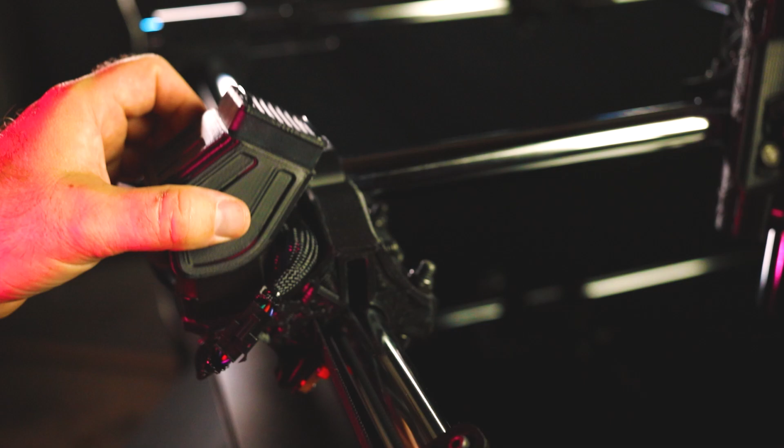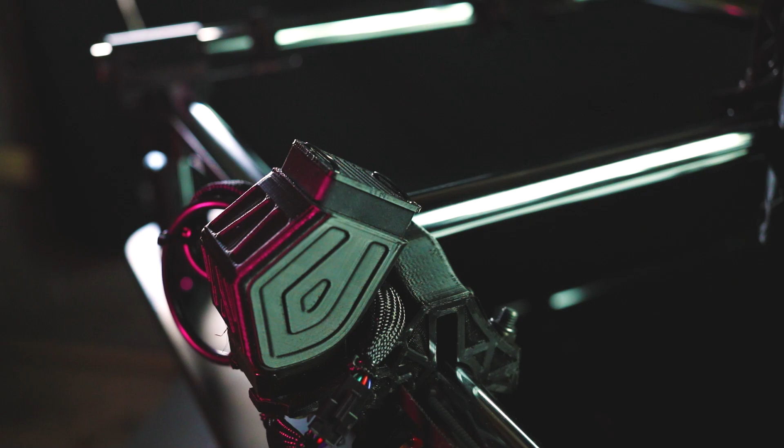since I've been using those fans. So I'd really suggest, if you're like me and want to push the machine to its absolute maximum, having some fan motors on your machine is going to be really helpful for the long term of the health of the machine.

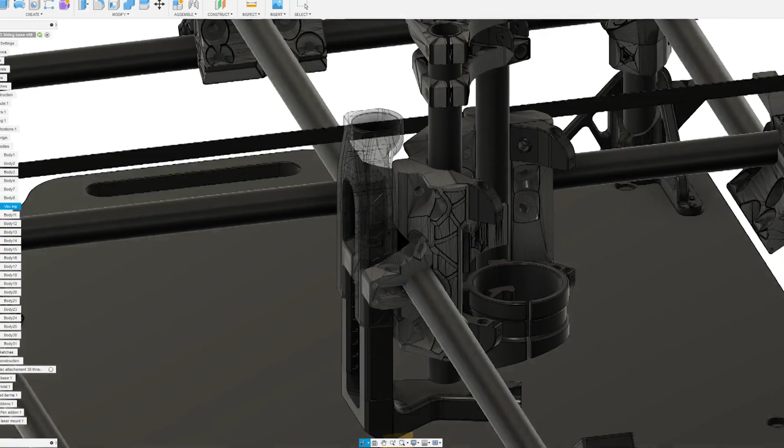Now, I've also upgraded the vacuum system for this machine as well. So if you've watched my previous video, I created what I call a Koala Vac. The idea is this vacuum housing just kind of grabs hold of the back there and is hidden. And that stops it from creating too much bulk out the front, because as we all know, once you start to add the vacuum system in front of your spindle, you start to lose a lot of your machine space.

So having it at the back here hides it really well, and also reduces the amount of space that it's used. So I haven't had a good chance to run that yet, but I've put the files out there for you if you want to have a look at it and give it a go for yourself. They're certainly there and available for you to download.

So it does give you a bit of a hint what I have and haven't been doing with this machine so far. So I haven't been creating any dust with the machine. I haven't put a spindle on there yet. Now, I don't really have a use for that because I have my Workbee CNC to run all my timber stuff on. So this machine for me was really about creating a machine for creativity. So things that are everything but cutting timber, such as using your pen or painting or even laser engraving and things like that. But I'm going to jump into that stuff later on in the video.

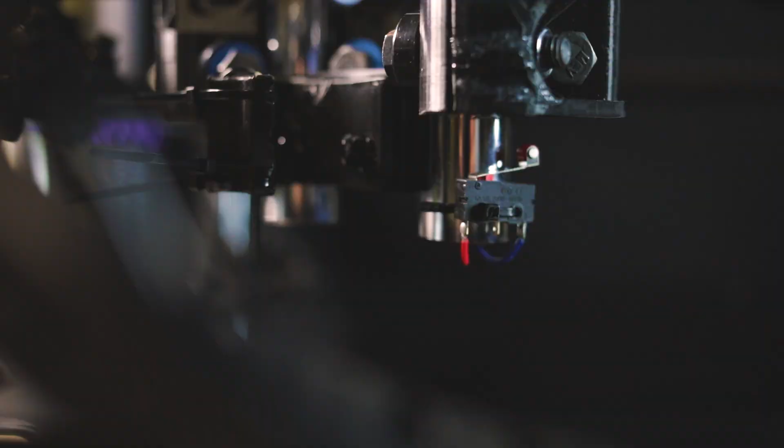So one other thing to take note of here with the electronics is that I've added my end stop to the base of my Z-axis. So I've just put a wire down the center there and popped it out the bottom and just used a zip tie to hold on that limit switch at the bottom. And that works out really well, and means when I home my machine at the very beginning, it goes to its maximum height. And then you can bring it down and set your Z height as needed. So that's a really nice addition to have.

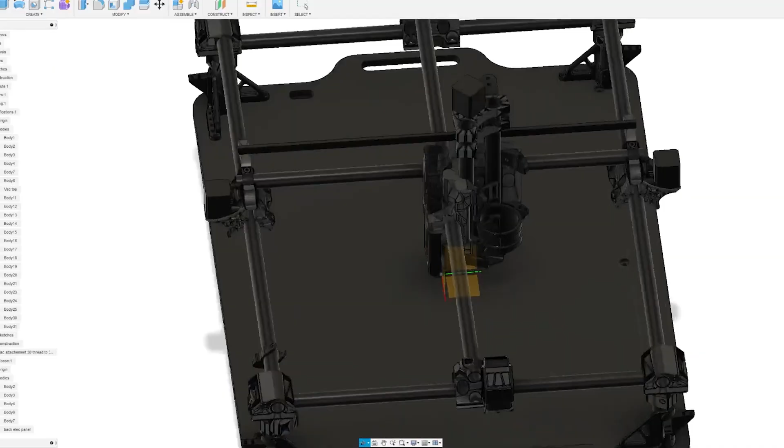Now, I'm going to talk a little bit about the electronics and what's underneath this build. So as you can see, I've created this custom table, and that uses a 30 degree chamfer around the side there, and the idea is to hide it a bit so it's kind of floating on top. But the other idea is that I wanted to put a drawer underneath so it's easily accessible to put items into, and my electronics on the other side.

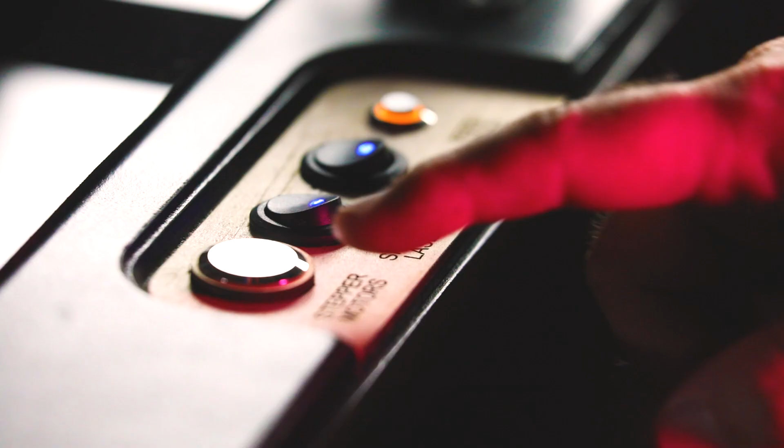So as you can see on the very front of my machine, I have 4 switches. The very first switch is to disable my motors. Now, sometimes when you're moving your machine around, you just want to make a slightly different adjustment, or you might be halfway through a job and you've paused it and you can't move the machine. So to be able to disable the motors and move the axis physically can be quite helpful.

The next 2 buttons, I've got a little rocker switch there. Those control the power outlets at the back of the machine. It's really nice to have access from both directions. I can turn those power switches on and off at the back and at the front. Now I've added them so I can put in extra things like lasers or vacuum cleaners or even a spindle, and I can just attach it straight to the back there and just turn it on and off from the very front of the machine. So it's really helpful to have that access in the little control panel.

The very last switch I absolutely love. This is a feed hold button, and that essentially just interrupts any machining that you're doing at that time. So if you're running something and you need to quickly change something but you don't want to stop the machining, it's really nice to have a little button there. I can just quickly press it and it pauses the machine program. I can quickly fix what I need to and then press play back on the computer, and then it continues as normal. So if you do have the ability to put an interrupt into your system, it's something that I would certainly suggest doing.

Now on the front of the machine, you can see that I've got a USB input. I use Universal G-code Sender for a lot of my computer-based CNC control work. I have an SD card there. Now, I'm going to talk about the SD card because that's really important as part of the offline mode of this machine. And I've got an e-stop too. So the e-stop is, I just click it once, it shuts off the machine completely. And I just use that as an on and off button mainly for my machine at all times.

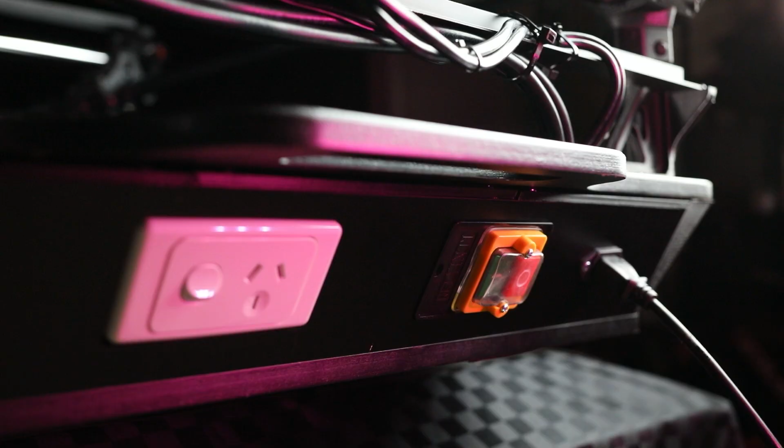Now at the back you saw that I have the 2 outlets for the electricity. And I also have my on and off buttons as well. So they're also a dead switch as well. I can switch it on and off from the back, so there's definitely no power going to the machine.

So comes to the most important part of this build, which is what actually controls it. Now I'm using a GRBL based system in this build, and that's by a company or a system called FluidNC. Now FluidNC is a GRBL based system, but they've been able to improve it and add it to an ESP32. Now ESP32 is essentially like an Arduino, but it is a much quicker, much faster version of the Arduino. It also has on the actual chip itself a Wi-Fi module and a Bluetooth module.

And that brings me to why I really love this machine and why I decided to go with FluidNC. So essentially what I can do is I don't have to tether it to a computer. I can attach my phone straight to the MPCNC. So I turn it on and suddenly the Wi-Fi signal comes up, I connect to it, and then I can go straight ahead and control the MPCNC straight from my phone.

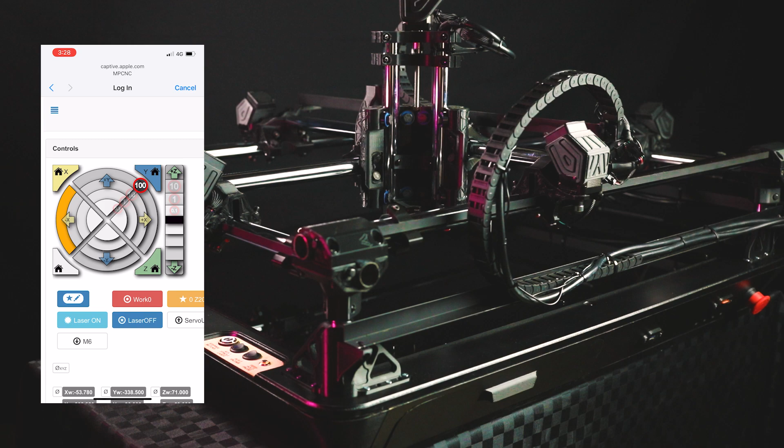And I can also then, using the SD card at the front, run my files straight from my phone, which is a really incredibly helpful feature, especially if I'm taking this around and I don't want to lug a computer. Unfortunately, FluidNC is still a developing software.

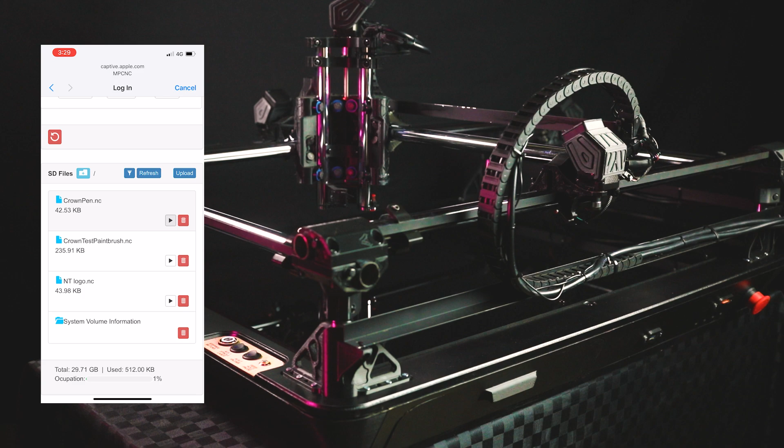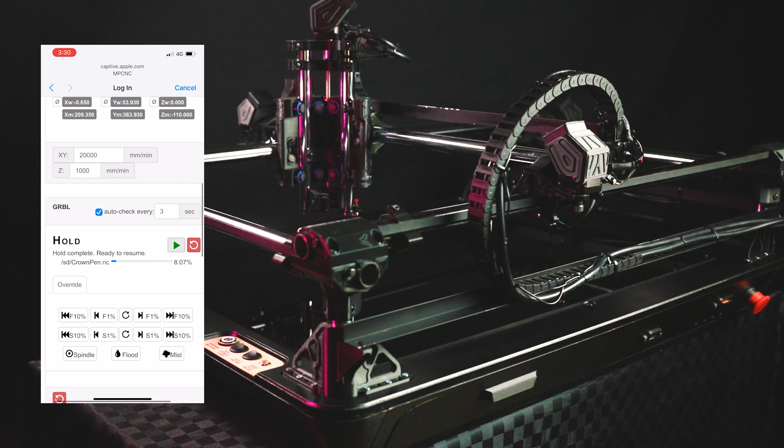I've had a lot of bugs with FluidNC. One of the main bugs is that it just stops halfway through a job, and I don't know why, but I think that it's got to do with the Wi-Fi chip overheating and creating issues for the actual ESP32. So I think it's one of those things that's evolving over time. And I might add a heatsink onto it to try and keep that chip nice and cool.

Now let's go and have a look at the drivers that I'm using. I'm using the same drivers as I did on my rotary CNC. These are TMC 2160 OC versions. These are standalone motor drivers, and essentially they're just hooked straight into the ESP32, which has control over them, and then one of those motor drivers controls two of these NEMA 17s. So I've been able to double the load out of the motor drivers to control two of the NEMA 17s.

And unfortunately, the lowest I could set is about 2.5 amps output on the Z-axis, even though I'm only using a 2 amp motor, and I haven't had any problems with that, so it's been really good. The reason why I decided to use them is that they're super quiet, silent motor drivers, and they're very effective in what they do. At no time do I ever have any skipping or any jamming or any issues with these. They work really, really nicely. So I'm impressed with these motor drivers, but there is a sacrifice that I did have to make.

One of the things that I wanted to do with this machine is when it homes at the beginning, so it goes up and finds its 0 point, I wanted it to square itself as well. That means that both sides of the machine would bump up against the end stop trigger. So I found a little workaround: I've wired the end stops in series. That means when this side comes to the end of its travel, it will go hard up against its limit and wait for the second side to do it.

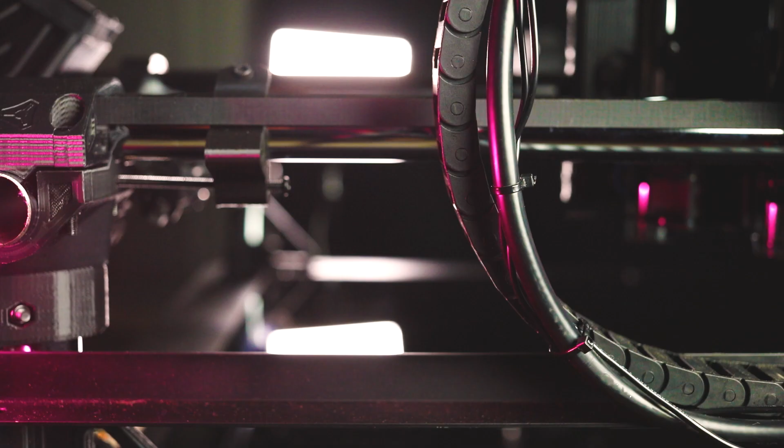It's usually only a split second in between, so you'd get a slight little grind, but that's okay. I'm not really too worried about the motor grinding if it hasn't been exactly square. After you've used it once, it's already square, so next time you go to use it, it seems to be quite square when it homes itself. So you only get that slight grind of the motor because one side of the axis isn't perfect with the other. That only happens very rarely. So I'm not too worried about it because these belts don't seem to skip, and no issues really with the skipping of the motor.

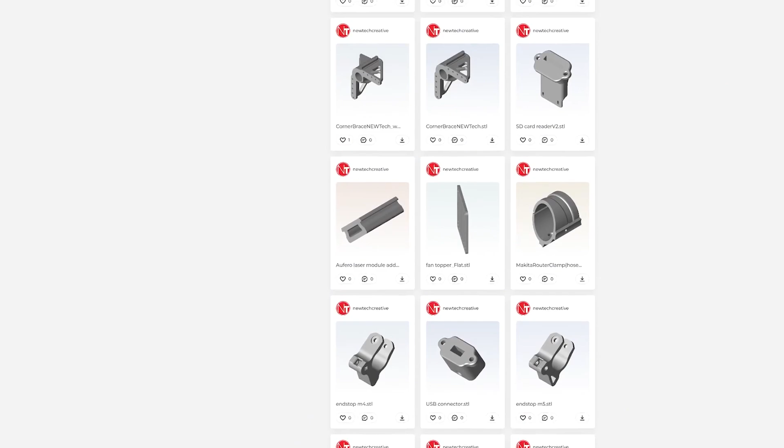And I've also uploaded the files to cut the base of this. Now the base of this can be done quite simply. You can cut it out using a bandsaw, and just using a router table, you can put a 60-degree chamfer end mill, and then you can go along and cut all your angles as you need to. But I'll put it up there for experimentation. If you want to go ahead and build it, that's certainly there.

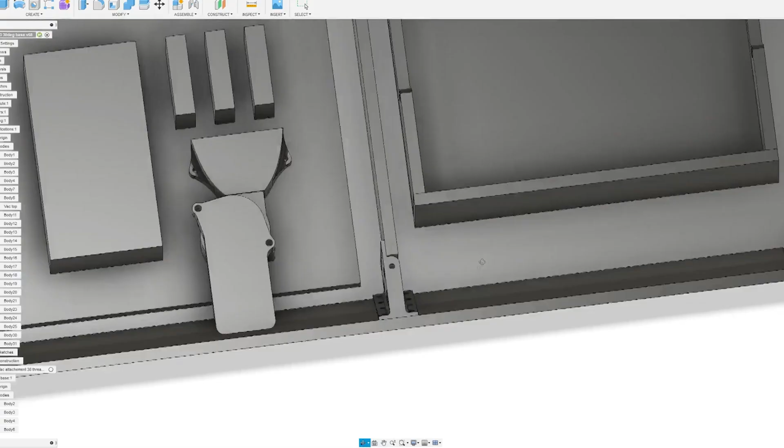I really like the design. It includes some 3D printing and also a really solid and rigid base for your machine to go on top, and you don't have to lug around another computer because all the electronics are underneath this machine. So let's jump on to the creative side of what I've been able to do with this machine and how much I can push this machine to its limits. So let's check it out.

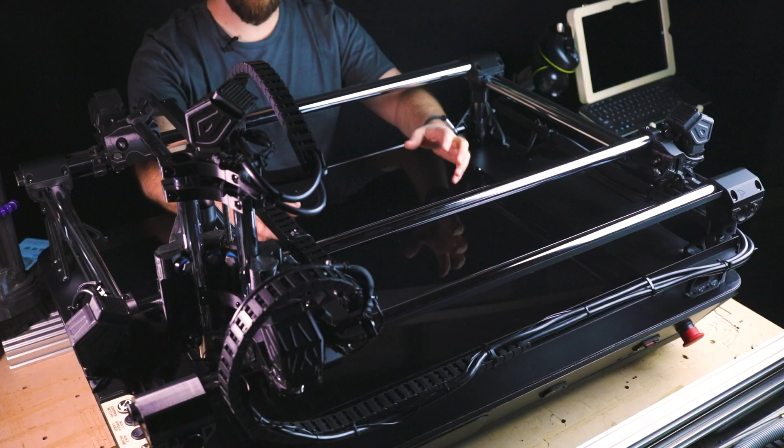Before I get started with all the creative side, I want to talk about how fast I've been able to get this machine. And to be honest with you, I started off with very conservative speeds of about 1,000 millimeters per minute. And that worked out really well. I didn't have any issues at all. So in the spirit of experimentation, I thought, well, why not just take it to the maximum and see what happens? So I put it on 20,000 millimeters per minute, and it still worked, and it worked really, really well.

Unfortunately, I did have a slight issue when it came to a pause or a stop and it wanted to change direction, because it was going so fast and my acceleration was so high, so it didn't slow down before that point. As it took off again, it would actually skip the pulleys on the belt. Very similar to driving a car in a drag race: at the beginning, if you floored it, your tires would spin. So that same thing happened here. When the machine came to a position and took off again, it just skipped on the belt. Now that's not a good thing, obviously, because you lose your position and it compromises the job.

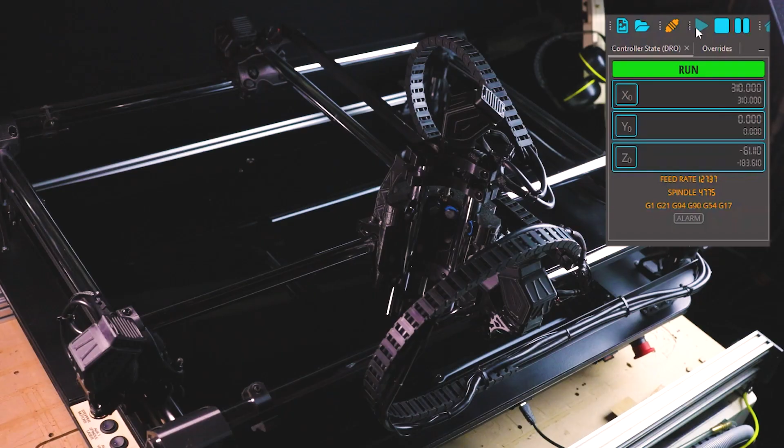But what I was able to do is tweak the acceleration settings so that it took off gently, ramped up its speed, got to its maximum speed and ramped down. Unfortunately, that means that I could no longer reach the maximum capability of 100,000 millimeters per minute, which is absolutely fine. So I've been able to achieve about 60,000 millimeters per minute on this machine, which is really exciting, and that's something that I never thought was possible. And it does it quite safely, so it ramps up and ramps down. So you can see here it starts off slowly, reaches its maximum and dies down. And you can see within that time that it never would have reached its maximum speed, just because the ramping takes so long.

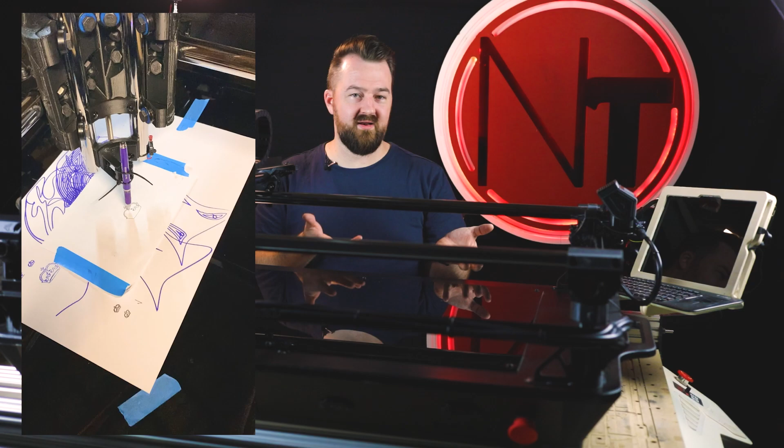So I'm going to start off with some of the experiments that I've done with a pen. So I've just added a pen onto it, and this is usually something that you would do when you first start off with using this type of machine. You would draw the crown. This is a test file that Ryan's made available. And so I went ahead and created this. I did this on a large scale and also a small scale. It was really great to test how fast I could run the machine. So I started off with drawing the crown, and then I moved on to bigger and better things.

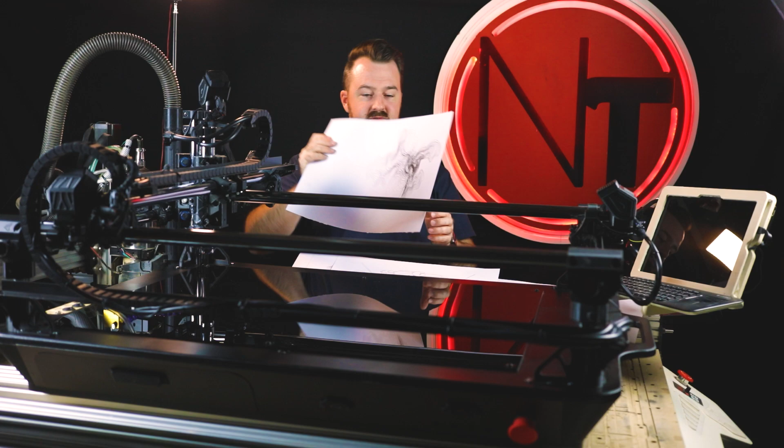So some of the experiments that I decided to do were based upon using a continuous line drawing. So I started off with some really strange and wacky designs within these spiraling lines that were kind of this organic formation, and that was really successful, and I think that it came out really nicely, and I would certainly want to develop these ideas even further. So using this kind of motion which just keeps on going and going to create some kind of mesmerizing organic shape. That was a lot of fun. I've also done a lot of ideas with patterns and overlaying patterns and different colors together using patterns.

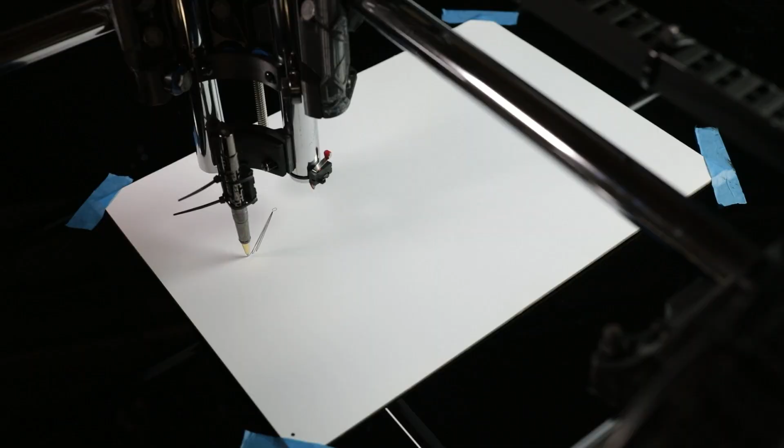So this one here is just once again using a continuous line drawing, which would just pretty much print over and over again on the page. I had some problems when I was running this because I was running it directly from the FluidNC via my phone, but unfortunately I'd only get so far before I think that the Wi-Fi system decided to overheat and then stop the program. So it was really fun.

I could then stop it, flip it over, do it again, and do it with a different color. So it was a little bit of fun having a bit of a play and seeing what else I could do and seeing how it would turn out. It's kind of the machine making up its own decisions.

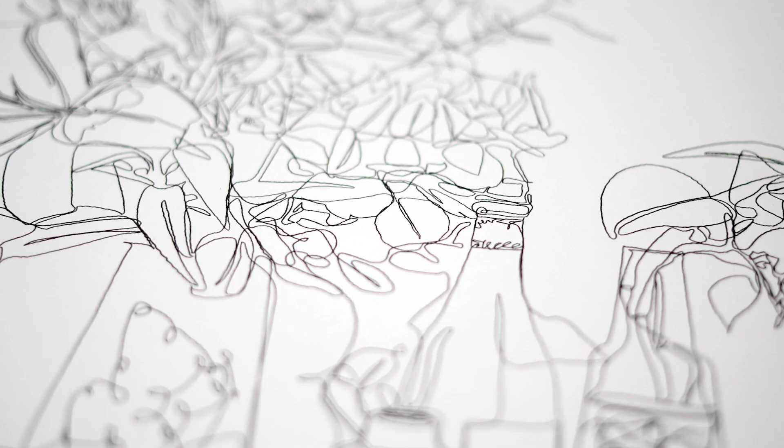I've also done this still life drawing too. So I really like this drawing. This took me hours to draw on Illustrator, but once it's drawn and you've got the digital file, you can just go through, and I think that it completes this within about 2 or 3 minutes. And so you can see this video there that it's going through, and the tiny little detail that this has been able to achieve, and so fast. It just blows me away what I've been able to achieve using this MPCNC, but it's just absolutely beautiful, the works that you can create using it.

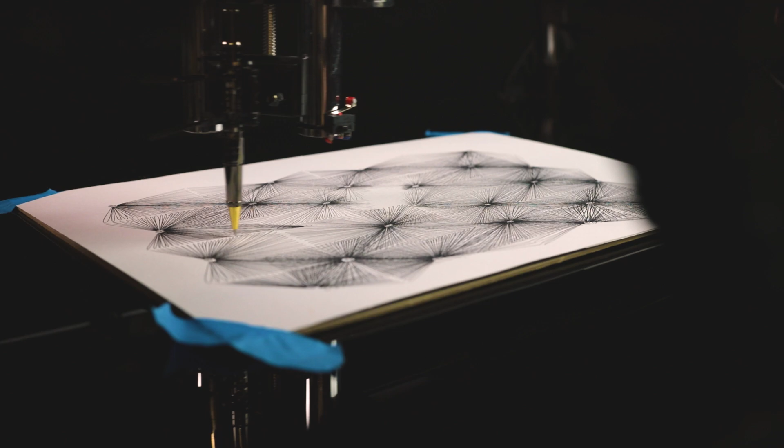So this is the full pattern version. You can see there was a slight low spot in the center, which it didn't come out, but I quite like the mistakes that happen when you're using the machine to create art. It's obviously just a spot where the pen didn't reach at a certain point, but I think it gives it a really nice focal point for this pattern, and it's not perfect, and I like that about this type of artwork.

So I also was able to use paint pens, and paint pens essentially are just like pens but have a flexible end to them, so they kind of mimic paintbrushes in a way, so really helpful, especially if I want to be able to create different depths and thicknesses of lines using the machine.

So essentially what I did was I went ahead and created another contour drawing. So with contour drawing, the pen doesn't come off the page at all, but this one I did use a V-carve setting on Fusion 360 to say that when my line was thicker, that would push the pen further in, and when it was thinner, that'll pull it further up, to create some different variations within the line.

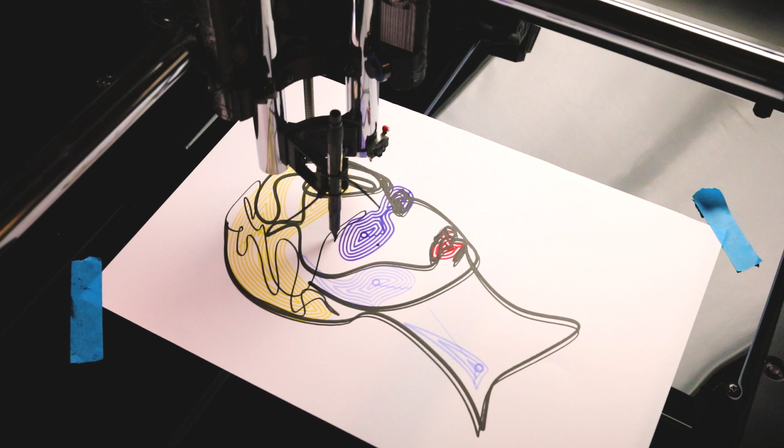So this is a picture of a lady that I traced and created myself through Adobe Illustrator, and I also made a different version of her as well. So this one is kind of like a pop art inspired one. This one just uses different colors in different parts, as well as using that continuous contour line as well.

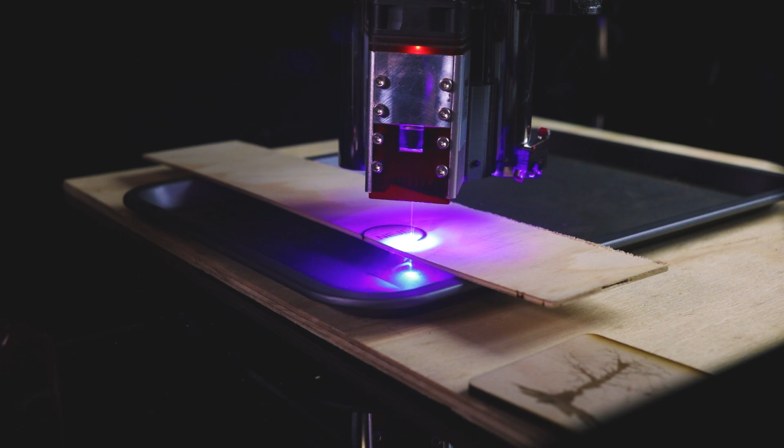The only issue is that to the main gantry here, I've put a 12 volt channel, so I could use that for different attachments, but this is a 12 volt module, this one's a 24 volt module. So I had to add a new power supply to get this one going, but that's absolutely fine. If I knew that beforehand, I probably would change it because this one does have the 24 volt capability too. So I just added my own little cables in there and I've hooked it up to the machine and attached it to LightBurn.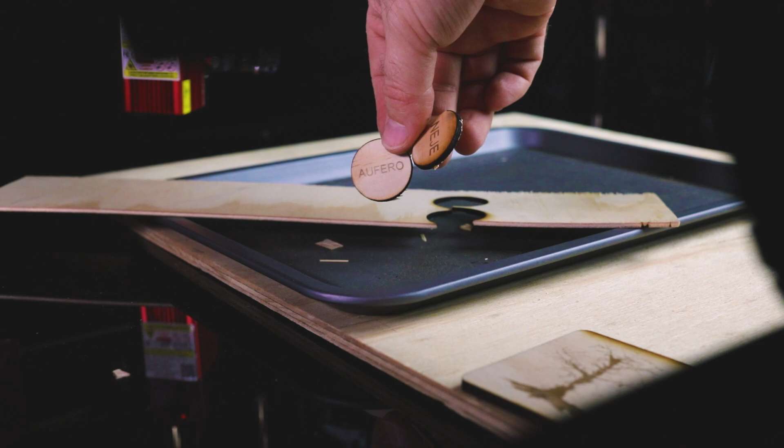So I believe I would use the Aufero on this machine in the future. It's really nice because I can put it on this machine and it has quite a large area that I can use the laser on. I can do large engravings, small engravings, and I can also use it to cut 3mm pieces of plywood as well. So I'm super excited to see what I can do with this machine in the future.

Just as a bit of a wrap up, guys, I really appreciate you watching my video and checking out my build of the MPCNC Primo. There's a lot of things that I've added into this machine, a lot of things I'm really proud of, and it's really exciting to see how far my knowledge has come over the years of building an MPCNC and other CNCs.

Now, I would really suggest, if you're interested in getting your very first CNC, you have a 3D printer, you like to tinker with things, and you've got lots of time to do it, jump into one of these projects because it's one of the best things that you could do as the beginning of your CNC life. And certainly look into different options for the electronics, because I know that the electronics have a really big impact on how the machine works overall.

So autonomously, this machine works beautifully, and I can just home it at the beginning and press play and off it goes. And essentially that is what's really captured me about this build, and what really excites me about taking it out there and showing people what you can do with CNC and how flexible and how easy it can be.